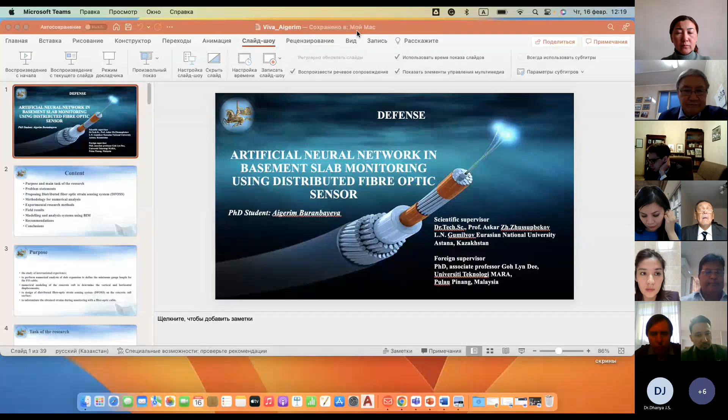Presentation should also open. Not open presentation. It's not opening. We didn't see. We don't see presentation. And now? Okay.

My scientific supervisor is Dr. Professor Askar Zhussupbekov, and foreign supervisor, PhD Associate Professor Goh Lyn Dee. And firstly, I would like to give you a brief summary of my report. It includes content, purpose, and the main task of the research, problem statements, proposing distributed fiber optic strain sensing system, methodology for numerical analysis, experimental research methods, field results, modeling and analyzing system using BIM, recommendations, and conclusions.

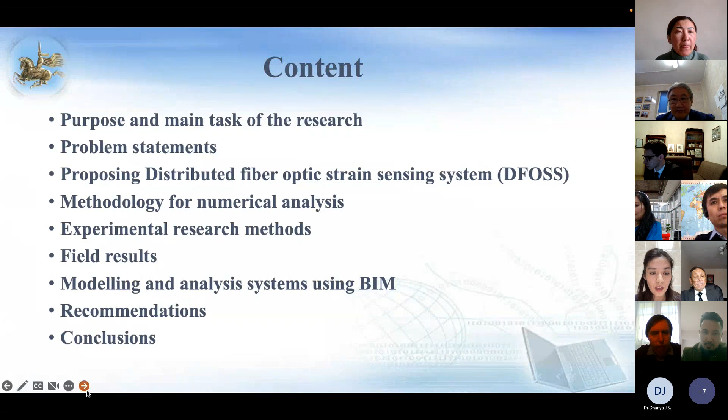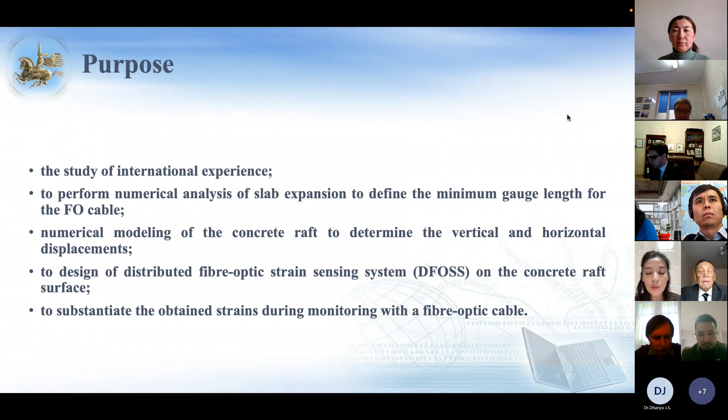The purpose of the study: to study international experience, to perform numerical analysis of slab expansion to define the minimum gauge length for the fiber optic cable, numerical modeling of the concrete raft to determine the vertical and horizontal displacement, numerical modeling of concrete raft to design a distributed fiber optic strain sensing system on the concrete raft surface, to substantiate the obtained strain during monitoring with the fiber optic cable.

The main task of this work is to develop a distributed fiber optic strain sensing system of foundation, which allows continuous monitoring of the foundation slab in order to avoid the appearance of cracks in the foundation slab and adverse effects during the operation of the building. And thereby, to improve the reliability and safety of the project through the timely identification of critical points of deformation, and to receive data from sensors and integrate it into the building information modeling system, which in turn makes it possible to process a large amount of data to make correct and quick decisions over the entire life cycle of the object.

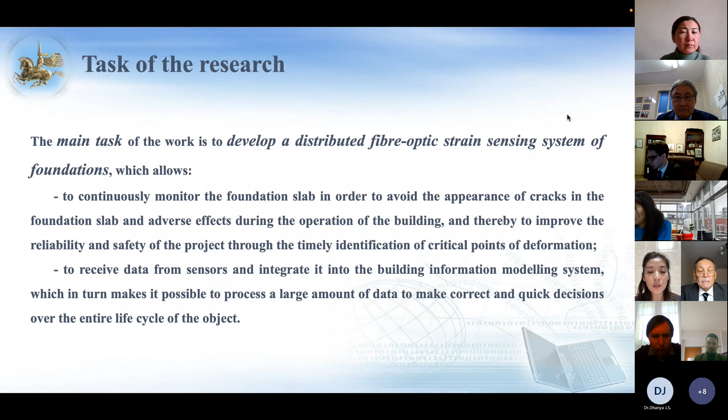Deformation is one of the most commonly monitored parameters in structural health monitoring systems, and deformation-based approaches were among the first to be studied and applied in structural health monitoring. Fiber optic sensors in civil engineering have recently become increasingly popular. The advantages are their small size, good resolution and accuracy, and excellent ability to transmit signals over long distances.

This is especially relevant for the construction of high-rise buildings, an example of which monitoring is presented in this study. The main goal of this work is to combine data from distributed fiber optic sensors to make faster and more confident decisions when detecting damage than is possible with only one sensor.

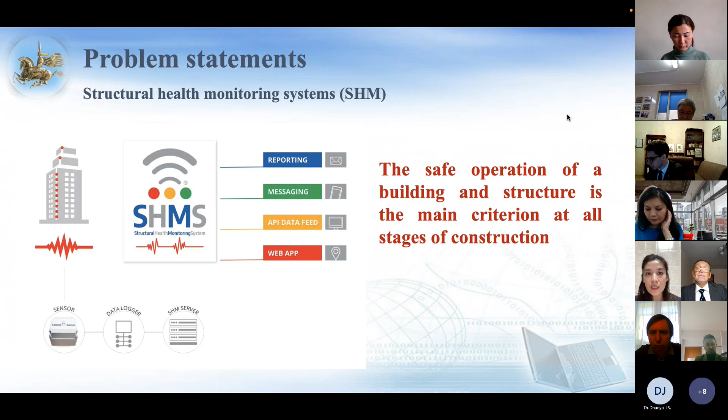Engineering design standards are often based on limiting the deformation and stress that occur in a structure. This is important because deformation is a measure of how close the structural material is to its strength and therefore indicates the potential extent of damage that has occurred. Knowing the continuous deformation profile helps to detect problems such as deformations, twists, and unevenly distributed ground-structure interaction forces due to ground heterogeneity.

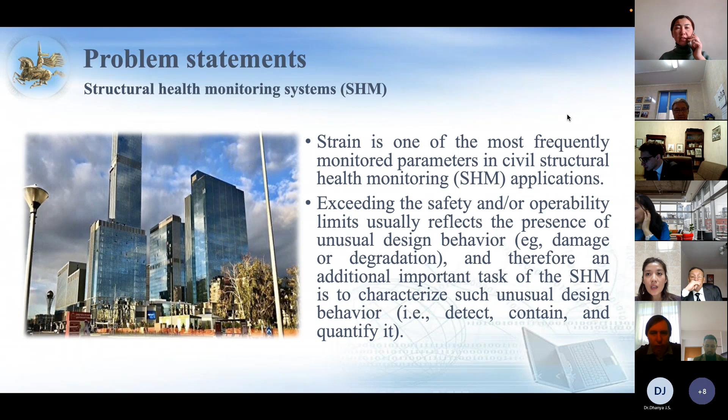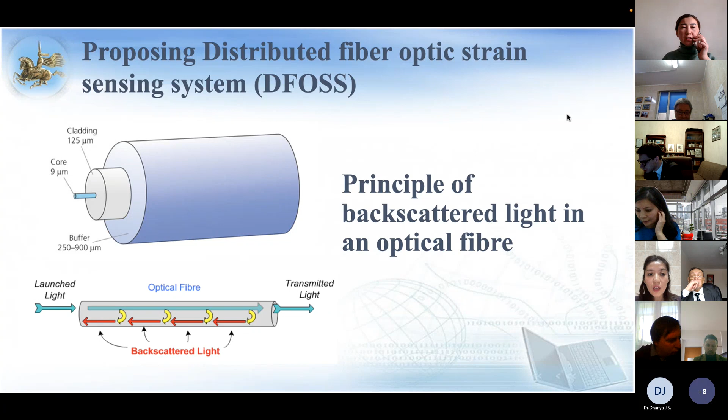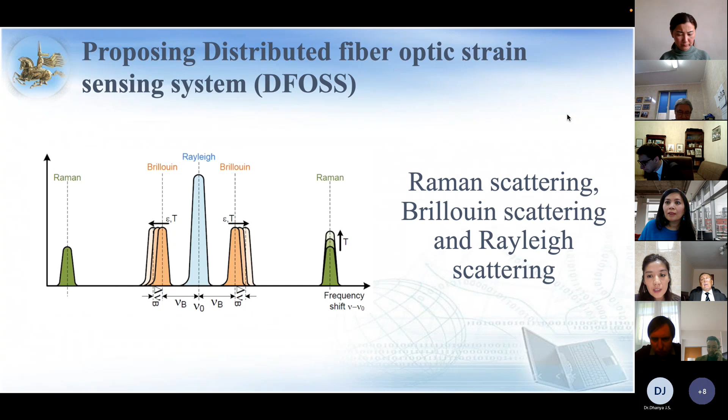DFOS is chosen to perform this task. The optical fiber used in the system provides more accurate data than other sensors. The sensors are connected to the device from which the light waves return through the optical fiber and are delivered to a signal pre-processing device.

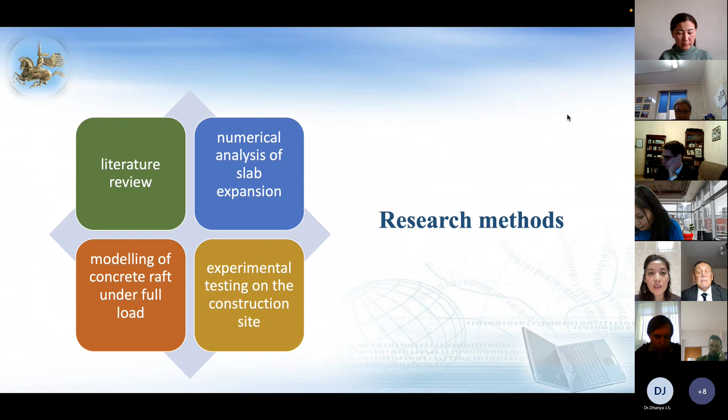The following research methods were used in this study: literature review, numerical analysis of slab expansion, modeling of the concrete raft under full load, and experimental testing on the construction site. First, the methodology for numerical analysis.

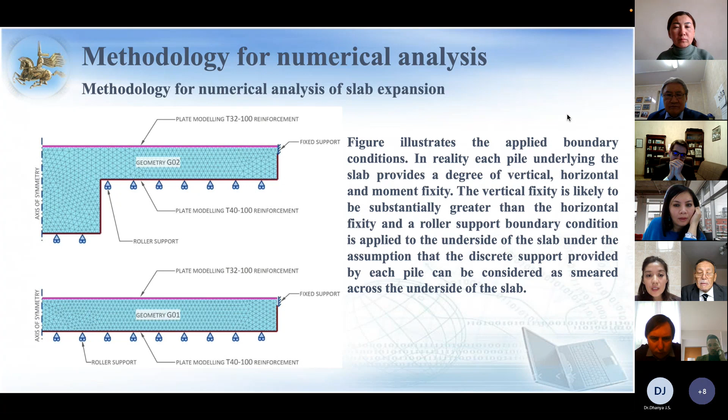The numerical simulation assumes that the reinforcement cover is 40 millimeters. For simplicity, it is assumed that the center of action of the reinforcement is 50 millimeters inside the surface of the concrete. Any concrete outside the boundary formed by the action center is ignored to simplify the mesh. According to the numerical simulation results, a gauge length of 2 meters is sufficient to prevent fiber optic fracture, and this is the value that should be chosen for the design.

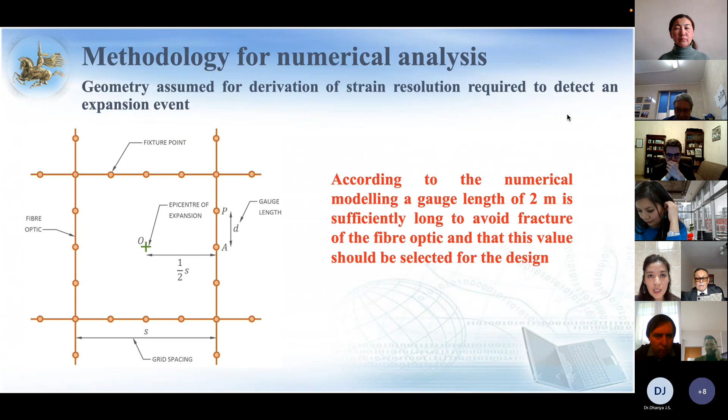The minimum required strain resolution for all expansion cases is 22 micro-epsilon. In the case of the 3.8 meter thick reinforced raft, the detectable surface strain limit for various expansion events is 51 micro-epsilon. If this limit is exceeded, additional surveys are required for a local diagnostic survey with concrete sampling and strain testing as part of the diagnostic survey.

Numerical modeling of the concrete raft was performed using Plaxis 3D software to determine the horizontal and vertical deformations of the raft. Modeling was designed for the 3.8 meter thick raft with axes 12 to 19 in the Y direction and axes C to K in the X direction.

This figure shows the loading system on a reinforced concrete square section raft podium. The load transmitted from the columns and floor level B4 was represented by a point load, and the load from the core walls of the building is a linear distributed load along the wall axis.

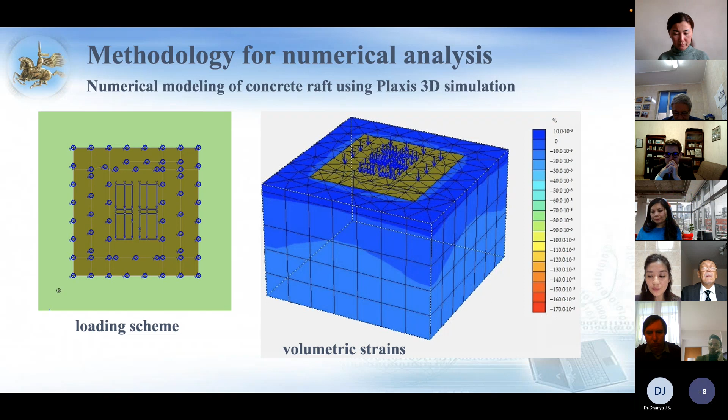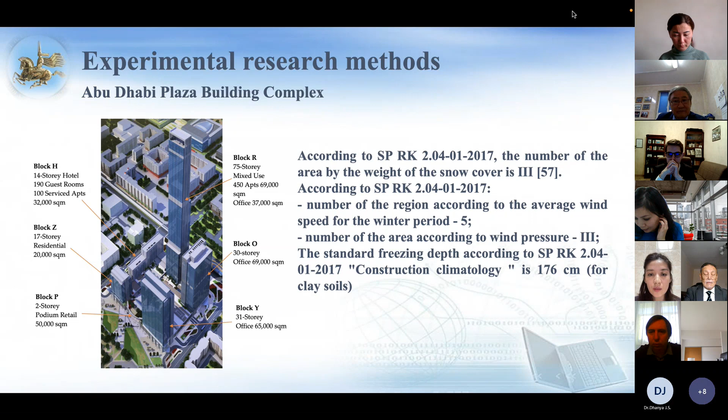The next research method was experimental, at the Abu Dhabi Plaza building complex. The site of the experiment is the basement of the tallest building complex in Central Asia, 320 meters tall. The engineering geological profile of the construction site can be seen in this graph. The soil conditions are presented in this table, with the properties of the soil: clay, sand and gravel, silty clay, rock debris, sandstone, and hard sandstone.

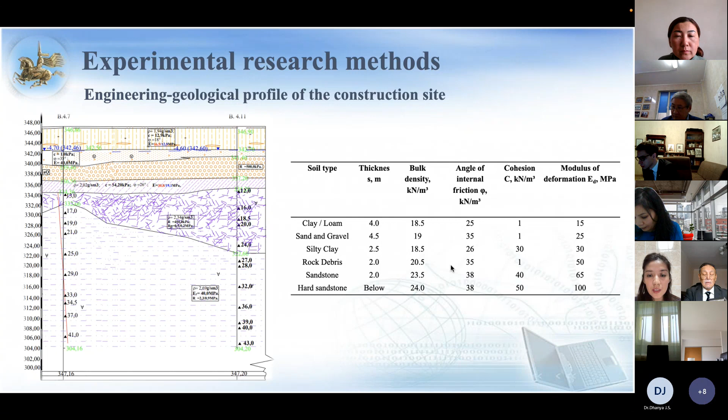The raft construction. The complex consists of several buildings, where fiber optic cable monitoring was conducted in three of them: Blocks R, Z, and Y. Block R is the tallest building in the complex and is a 75-story residential building with a 4-story underground parking lot at the base.

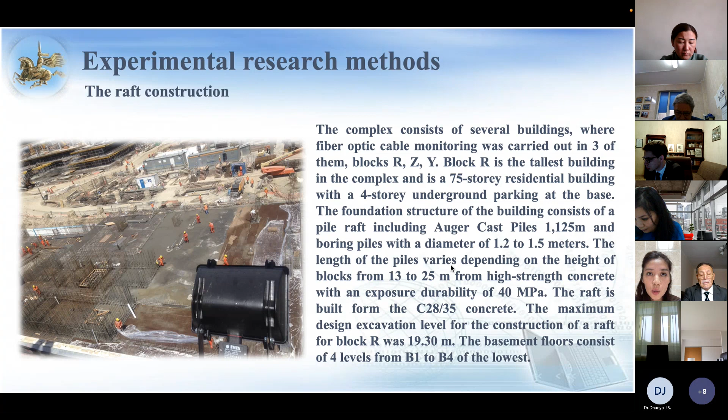Now let's move directly to the distributed fiber optic sensor system. The proposed DFOS system consists of a grid of fiber optic cable attached to the B4 plate and connected to an analyzer located in a temperature-controlled room at B1. On the B1 level, there is an analyzer monitoring system for temperature and strain data collected via the distributed fiber optic sensors.

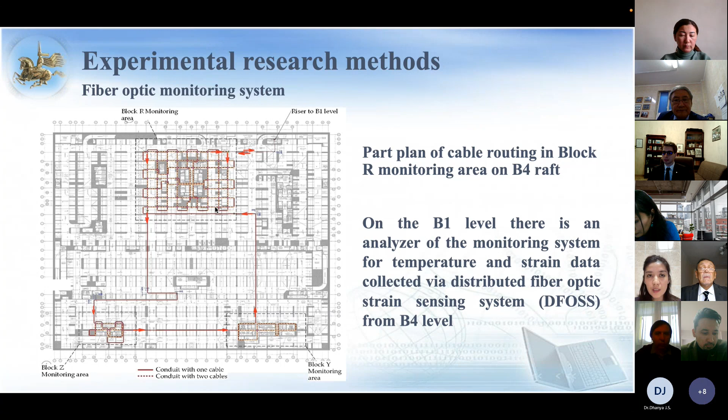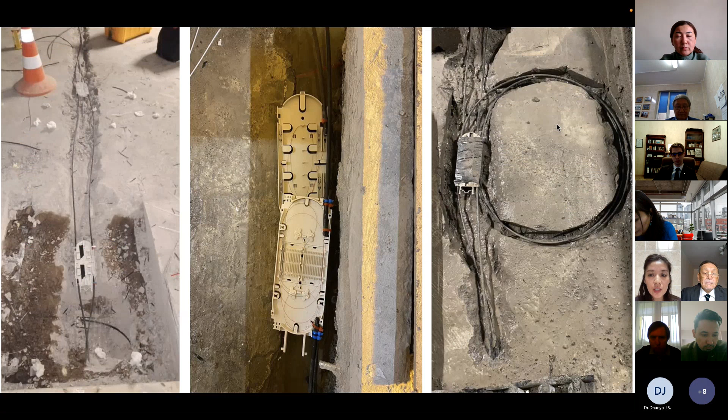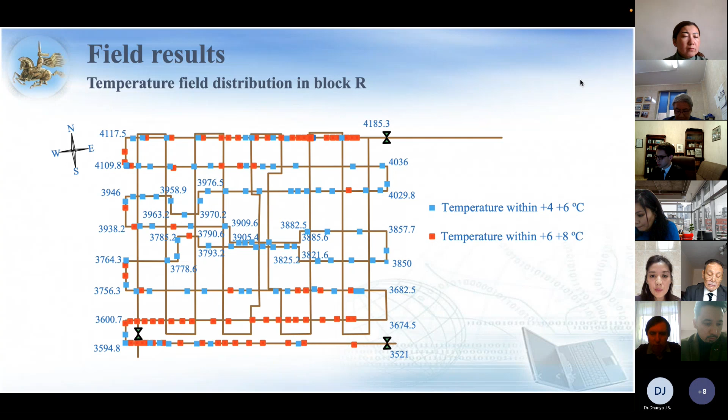In this case, the position on the cable along Y direction in the basement raft of the high-rise block starts from 115 meters, and the length is 567 meters. This graph demonstrates the results of fiber optic cable deformation for block R in the reverse direction.

After bypassing blocks Z and Y, laid in horizontal direction X, on the section from 3,521 meters to 4,121 meters. Here, significant compression deformations are registered in the middle section from 3,695 meters to 4,100 meters, and significant tensile deformations in this area on the south side of block R.

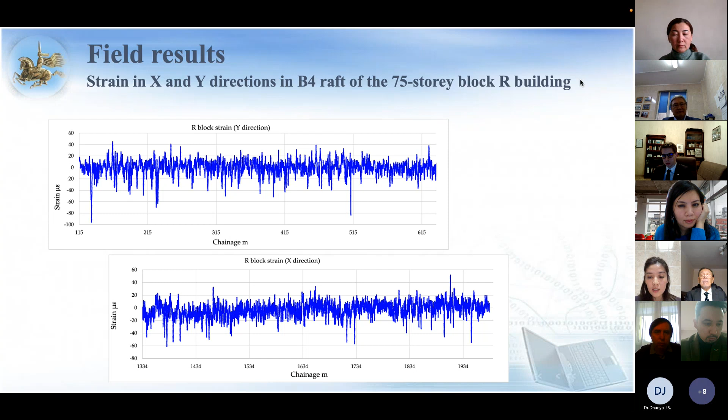As can be seen in this figure, the fiber optic results show an alternation of deformation signs along the length of the fiber optic cable embedded in the raft of the lowest level. This level is B4 of block R. Compression deformations prevail in the central part of the core.

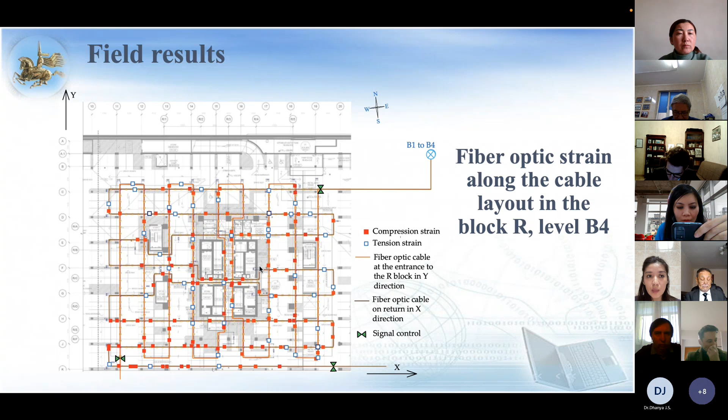In this zone, there is increased load from the reinforced concrete load-bearing walls. The tensile strains are most concentrated on the extreme axes as well as near the joints of the columns. The interpretation of the compression zones in terms of magnitude is shown in the next figure. We can see the tensile zone in this figure.

The fiber optic cable was laid in the base of the raft under the highest block R. The total length of the cable is 4.4 kilometers, including strain and temperature measurement fibers running parallel in one cable, of which 664 meters in the X direction and 567 meters in the reverse Y direction under the R block particularly.

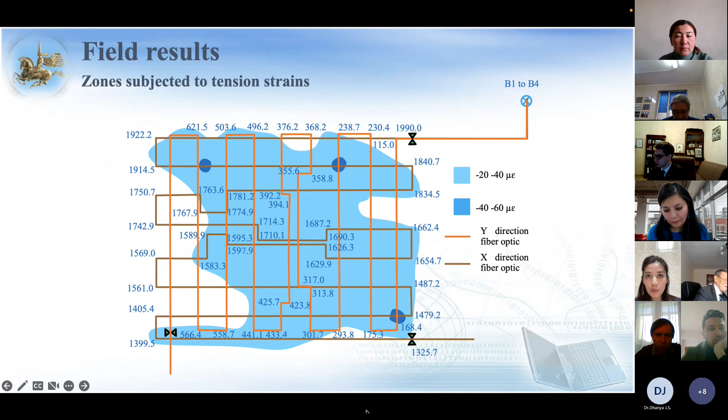According to the monitoring results, the stress zones in the R block are evenly distributed with values of minus 20 to minus 40 mu epsilon, with a slight predominance on the right, eastern side. Individual minus 40 and minus 60 mu epsilon spots are occasionally located along the outer contour of the building, while the central, northern, and eastern parts of the building show a more stable pattern of tensile stress accumulation.

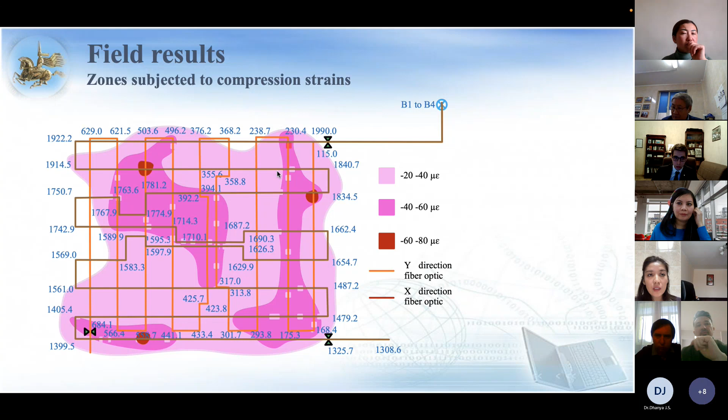Local tensile strains are most concentrated over the extreme axes as well as near the column joints. Compression deformations prevail in the central part of the building core, in the zone of increased loading from the reinforced concrete load-bearing walls. Fiber optic observations showed an increase in relative strains near the zones of concentrated loads up to 80 mu epsilon. It is 0.08 millimeter per 1 meter of length in the horizontal plane.

Analyzing this figure, single scatter points of tensile strains are located in the area of the columns and explained by the stretching of the upper part of the raft. The concrete at the column bearing points is subjected to compression due to point loading from the upper floors. The top layer of the raft in the vicinity of the connection between the column and the raft is subject to deflection. And because the optical fiber is located in the upper layers, it experiences stretching in this place, but in the middle of the deflection zone, the cable is subjected to compression.

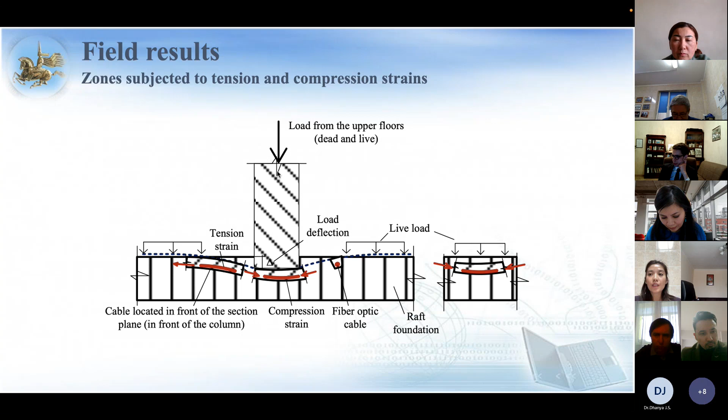In the middle part where the distributed load is applied, the plane of the raft is uniformly compressed. The next slide is a discussion comparing numerical analysis results and experimental measurements. The simulation results represent a general picture of the distribution of settlements in the building plan.

They don't take into account local effects from the concentrated load from columns and core walls, and also don't detail the horizontal plane where the points of dangerous tensile deformation are located. Since concrete doesn't work well in tension, the local tension of concrete is fraught with crack formation. Observation showed increased relative deformation near the zones of concentrated loads from columns, up to 80 mu epsilon in the horizontal plane.

As can be seen, fiber optic results show alternating strain signs along the length of the fiber optic cable embedded in the raft of the lowest level of block R. Compression deformations prevail in the central part of the building core, in the zone of increased load from the reinforced concrete load-bearing walls.

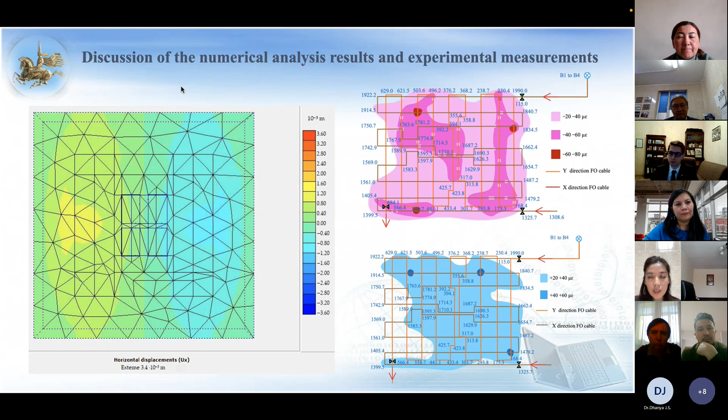All building properties, components, documentation, and structural data must be accessible via the BIM model. The BIM model database is easily represented using the IFC standards to pass the exchange files from sensors to the system. In this research, a foundation slab with the integrated fiber optic sensor system was taken as an example to show that the model facilitated the interpretation of data using a dynamic BIM environment.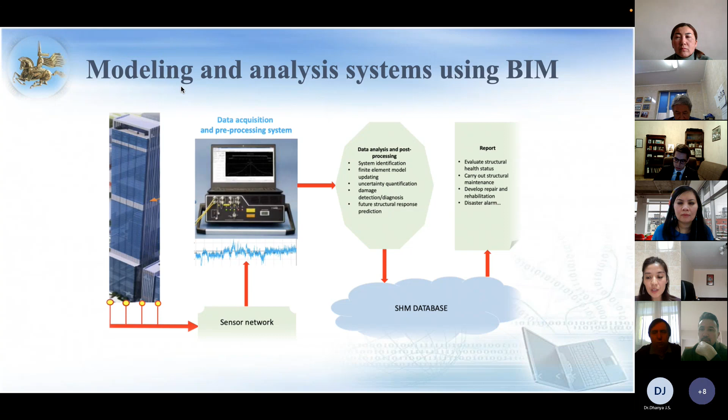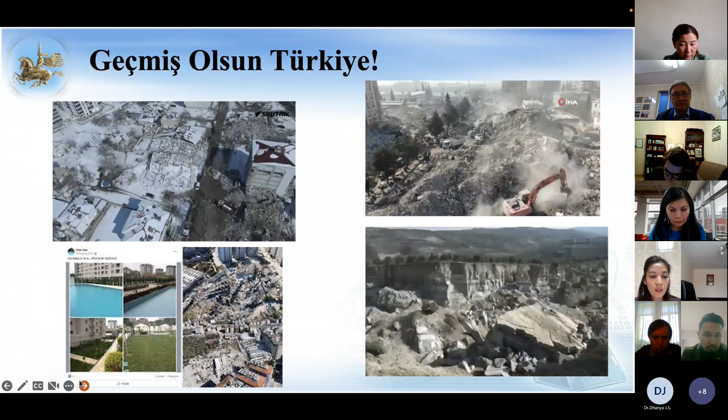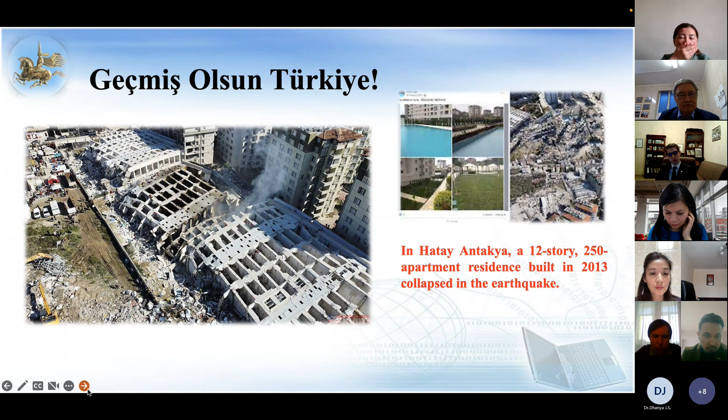Moving to recommendations, there are a lot of recommendations. I'm saying one of them. Based on the results of the study, we recommended the use of combined strain and temperature sensors, which are designed for distributed monitoring of strain and temperature over long distances using Brillouin scattering. According to the numerical modeling, a gauge length of 2 meters is sufficiently long to avoid fracture of the fiber optic. The minimum required strain resolution across all expansion events is 22 mu epsilon.

According to the fiber optic cable material properties, the maximum determined strain is 1.5%. It is recommended to determine the optimal format for structural health monitoring data storage in the digital database using a BIM system, as it will help increase the efficiency of monitoring further in operation and speed up decision-making time.

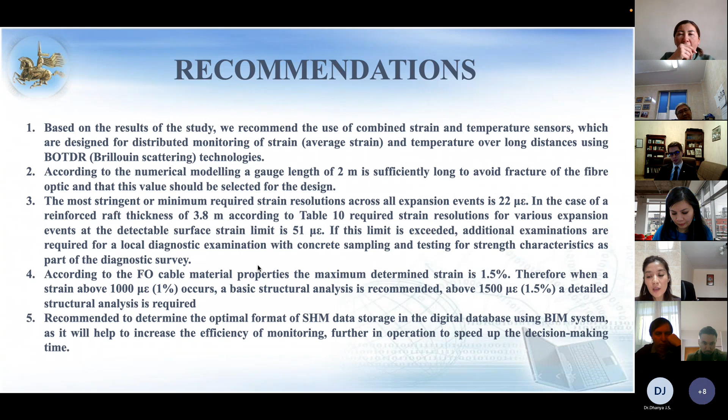The tension strains are concentrated along the extreme axes of the building with a predominance in the southern part of block R, as well as in the immediate vicinity of the columns, in a range of 20 to 40 mu epsilon, with separate spots of 40 to 60 mu epsilon.

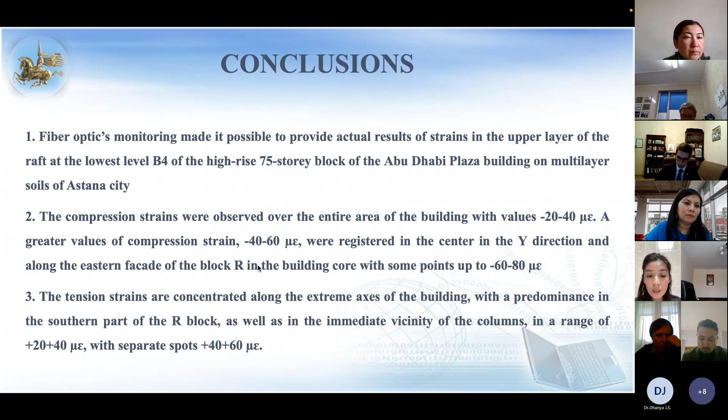Individual patches of tension strains near the column have been explained by the increased deflection of the raft under application of a concentrated load. When the deformation of 600 mu epsilon in crack width is exceeded, it requires a local diagnostic examination with concrete sampling and testing for strength characteristics.

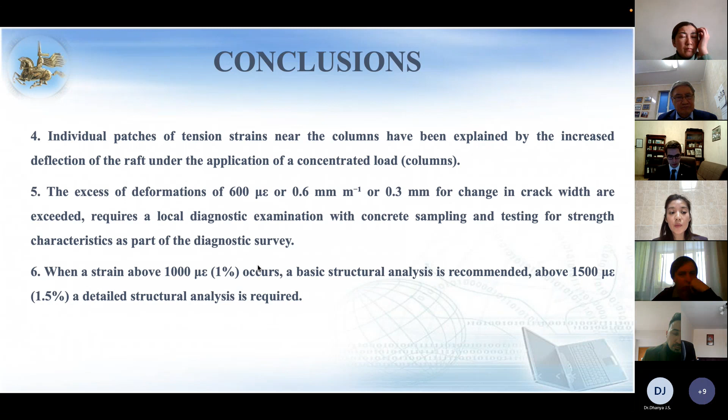When a strain above 1000 mu epsilon occurs, a basic structural analysis is recommended. Above 1500 mu epsilon, a detailed structural analysis is required.

That's all. Thank you for your attention. My report is now concluded.

Okay, thank you for the report. I want to continue. What questions will be asked to the applicant? Questions can be asked orally or in written form. So, if there are some questions, please. So, I have some questions. Maybe I begin.

So, I want to ask firstly, why was there observation in this building? My observation is Abu Dhabi Plaza, yes? Yes, yes. Because some water was getting into the foundation, and Arabtec Construction decided that this building needs observation of the foundation, and to take a subcontractor like SMARTEC Technology.